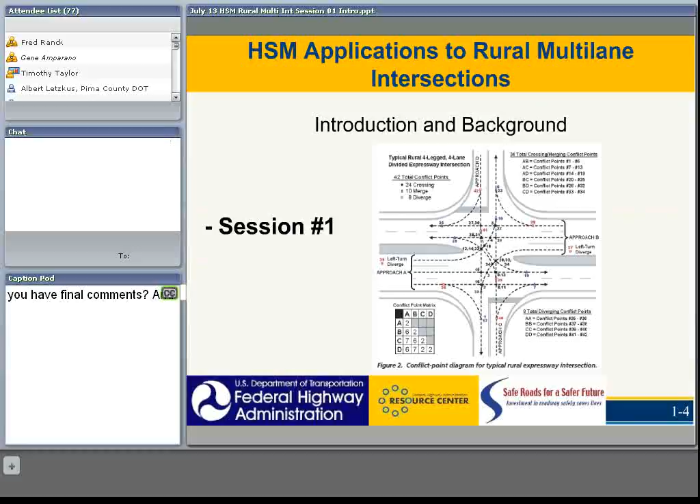This is session 1, which is basically introduction and background to the rural multi-lane intersections applications of the Highway Safety Manual. In this first session, what we hope to do is review the crash frequency performance of rural multi-lane intersections, that is the safety, and also define the substantive safety that can occur beyond the nominal safety effects.

When you look at the total of multi-lane highways, both rural and urban, we have approximately 4 million miles of public roads, nearly 1 million miles on the federal aid system, and about 166,000 of those are multi-lane highways, or about 17%. About 45,000 miles are multi-lane undivided, making up about 27%. And a bulk of 121,000 miles are multi-lane divided, or about 73%. So there are more divided multi-lane highways than undivided, and that's what we're going to be looking at today, are the multi-lane divided.

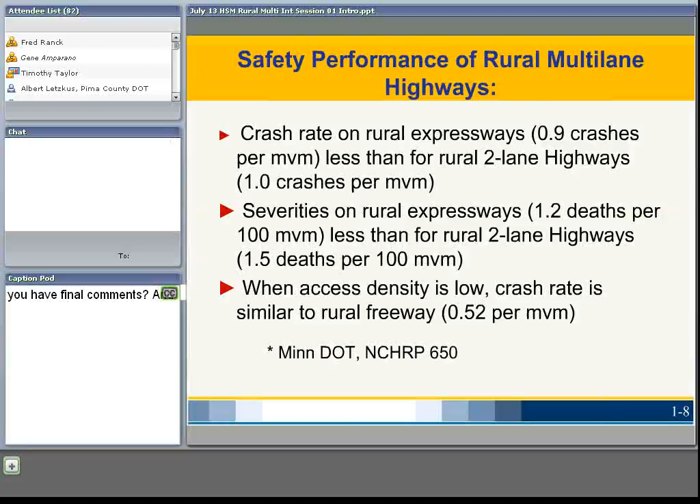In 2008, of the U.S. total intersection crash characteristics, there's a significant amount of accidents occurring at intersections, based on the highlight there. We find that this number is overrepresented because 57% of fatalities and serious injury crashes are occurring at intersections, which is an overrepresentation based on the number of miles or segments versus intersections.

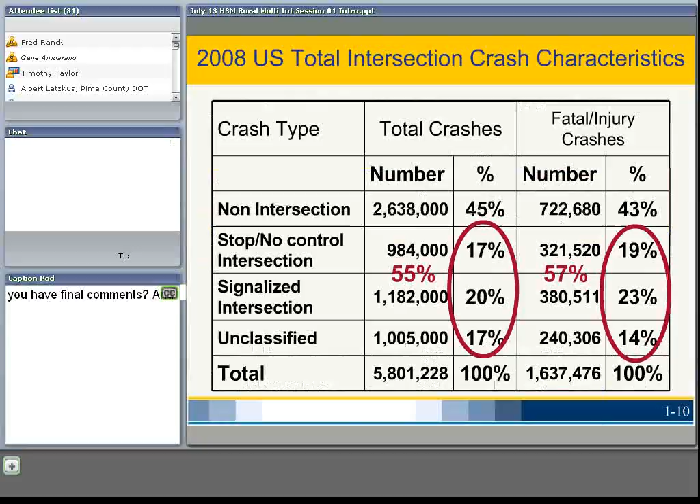When we look at crashes by divided and undivided highways, we see that the crashes for unsignalized divided expressways greatly outnumber the crashes for signalized divided highway intersections, approximately 56.5% at unsignalized locations—two-way stop control intersections, which is very typical of intersections you find on rural divided highways.

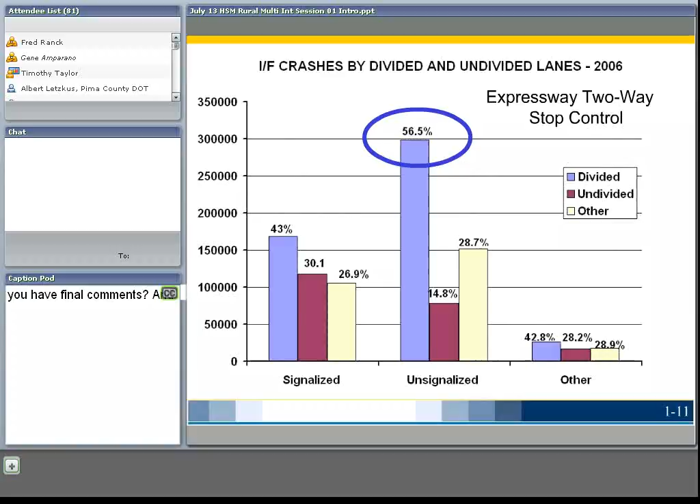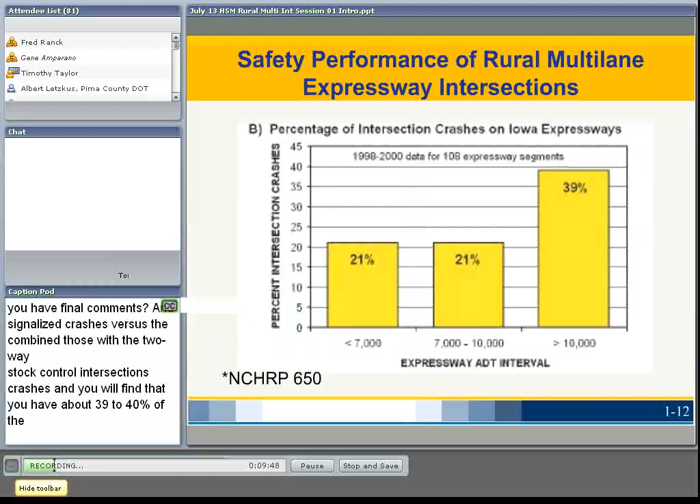This graph shows the percentage of intersection crashes in Iowa for their expressways, 39% intersection crashes when the ADT is over 10,000, which relates closely to what we saw from the earlier slide. When you combine the signalized crashes with the two-way stop control intersection crashes, you find that about 39 to 40% of the crashes are occurring at intersections.

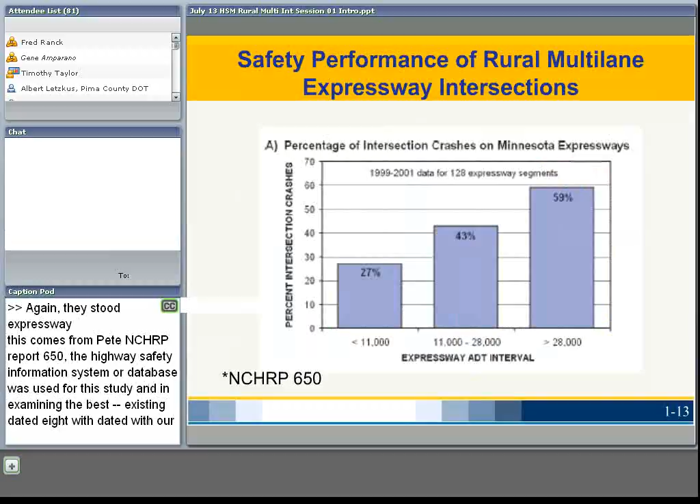Again, a MnDOT study, expressways. This too comes from the NCHRP report 650. The Highway Safety Information System, or database, was used for this study. In examining the existing data for the 5 states in the system, which Iowa and Minnesota were included, it's now been expanded to 8 states. It was determined that supplemental information on roadway access points and roadside condition would be needed.

One efficient way to collect this type of data is through the video disc photo logs. The photo log simply contains images of the roadway taken at 16-meter intervals, and these images can be randomly accessed in seconds under the control of the microcomputer. At the time this study was conducted, the video disc photo logs were only available for Minnesota, so only data from Minnesota were used for the statistical modeling analysis.

Data for accidents reported from 1985 through 1990 were used for this study. Things came out of this study that were significant, one of which was that 87% of right-angle crashes were due to the inability of minor road drivers to recognize the oncoming expressway traffic, and/or their inability to select a safe gap in the expressway traffic stream.

The other thing noted was that 78% of the right-angle crashes were far-side type collisions. That is, a right-angle crash involving left-turning or crossing minor road vehicles that successfully cross the near-side intersection across the median, but then collided with an oncoming vehicle on the far side of the intersection.

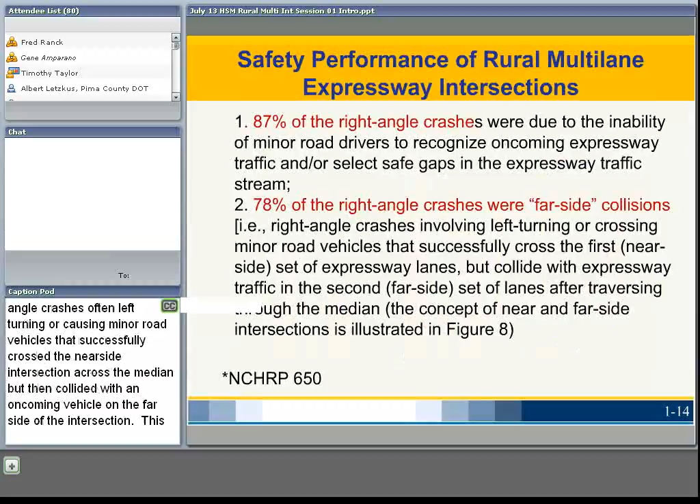This will be illustrated in the next slide. But the third thing found from this study is that intersection recognition was not important. We may think that running of the stop sign was a major contributing factor, so the recognition by drivers on the minor or stop-controlled approach was not, in fact, a contributing factor in any of these right-angle type crashes at these intersections.

Another study found that the ratio of far-side versus near-side collisions at 30 two-way stop control rural expressway intersections with the highest crash severity indices in Iowa was 62% to 38%.

However, at 7 of the intersections where horizontal curves were present along the expressway, the far-side and near-side collisions were nearly equally distributed at 51 and 49% respectively. So therefore, it looks like horizontal curves on the main line seem to create a unique hazard for the minor road approach.

This illustrates the near side versus far side. So if north is up and south is down, a vehicle on the north or southbound approach colliding on the first roadway would be a near side intersection, and colliding with a vehicle again southbound on the far side intersection on the other roadway would be considered a far side intersection.

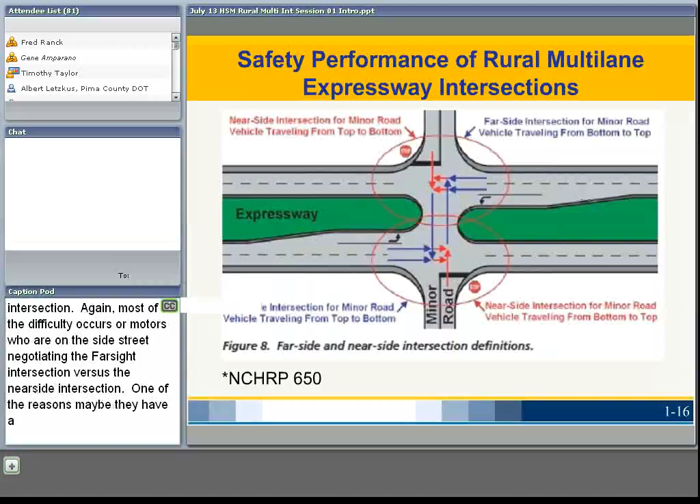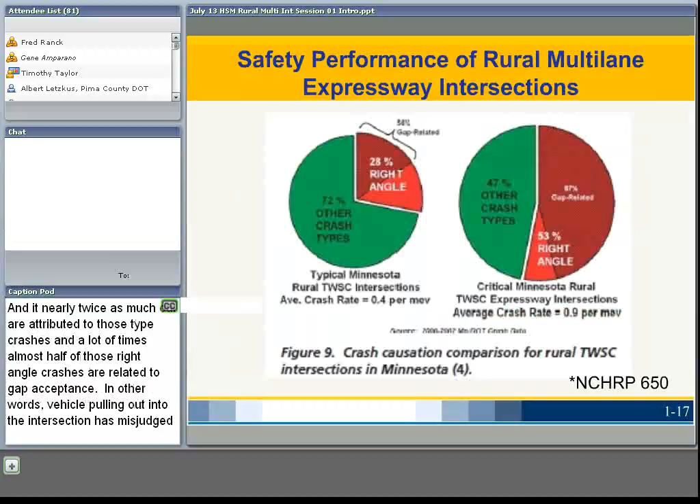Key safety principles and design: we all know that knowledge is imprecise, but judgment is essential. Meeting the standards does not necessarily make a highway safe.

Some of the important features of highways are not determined by the standards, such as alignment of left turn lanes, whether they're angled or parallel, spiral transitions to curves, or the use of center two-way left turn lanes. So we know that meeting the prevailing highway design standard does not necessarily make a highway safe. The word standard gives rise to sometimes misinterpretation. We often think of a standard as being a guarantee of some degree of quality. Conversely, if something is substandard, it's understood to be deficient. So implied is a distinct difference between what is good and acceptable and what is bad and deficient. And this meaning does not apply to highway design standards in their relationship to highway safety.

This is a bit of a new way of thinking, but one that is necessary with the advent of the Highway Safety Manual. The safety of a highway does not change abruptly when some highway dimension changes slightly. In addition, highway design standards evolve with time, and are not a demarcation between what is safe and unsafe. Many highway design standards are limit standards, and just meeting them does not necessarily make the highway as safe as it can be. So it is a sign of an ungenerous design that may or may not be justified.

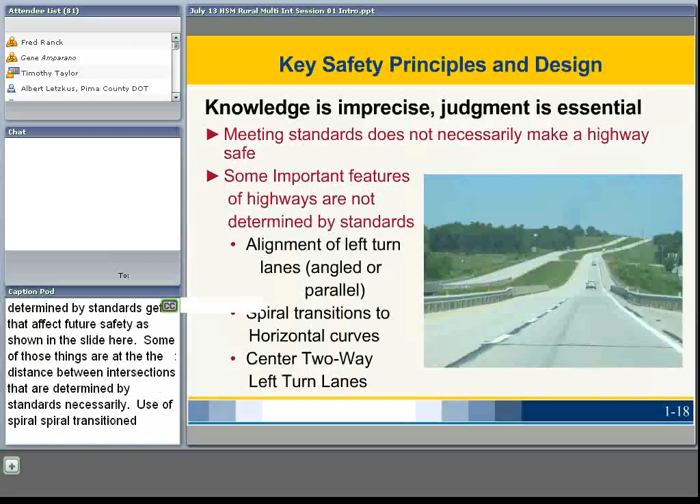Important features of the highway are not determined by standards, yet they affect its future safety, as shown here. Some of those things are the distance between intersections, which isn't necessarily determined by standards, use of spiral transitions to horizontal curves, and other things.

That leads us again to the discussion of nominal safety versus substantive safety. If you've been involved in webinars in the past, you're probably familiar with this, but to repeat for those who are not: nominal safety refers to compliance with standards, warrants, guidelines, and sanctioned design procedures. Substantive safety is the expected or actual crash frequency and severity for a highway or roadway. The term nominal safety was coined by Dr. Ezra Hauer. It was used to describe the characterization of a situation in terms of its adherence to design standards and practices.

We can think of a road as being nominally safe if it meets the minimum standard of care and is current with respect to published standards and guidelines. On the other hand, substantive safety, or a quantitative approach to safety, is its actual or expected performance in terms of crash frequency and severity. So it begs the question: are the two dimensions of safety the same, or do they express related yet fundamentally different information about a highway?

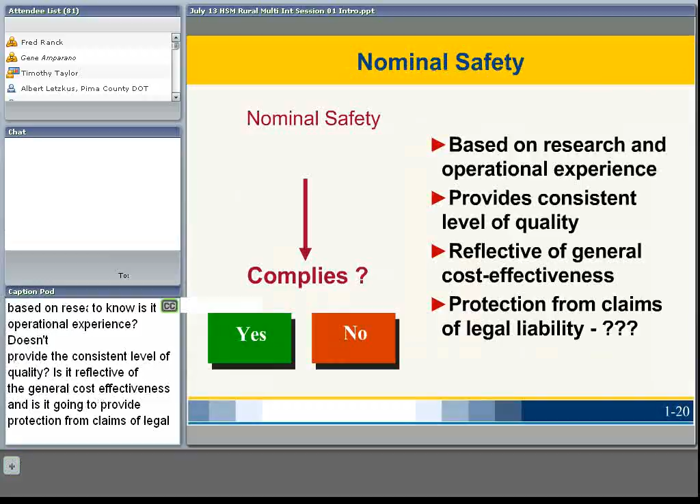When we consider nominal safety, we want to know: is it based on research and operational experience? Does it provide a consistent level of quality? Is it reflective of general cost effectiveness? And will it provide protection from claims of legal liability? That's basically the first step—have we complied with nominal safety? And that's simply a yes or no question.

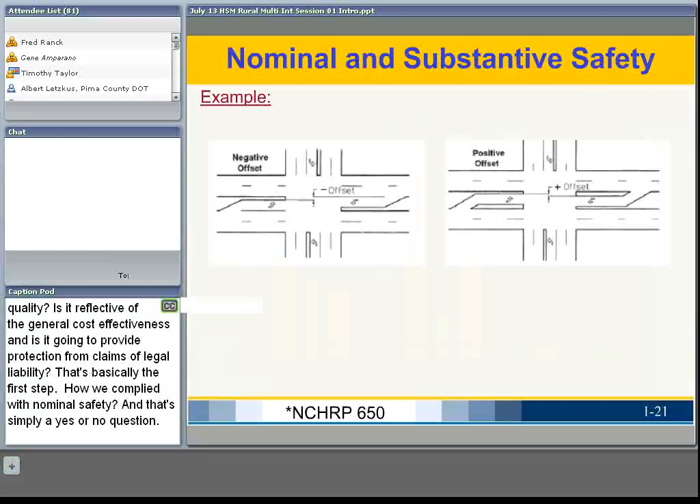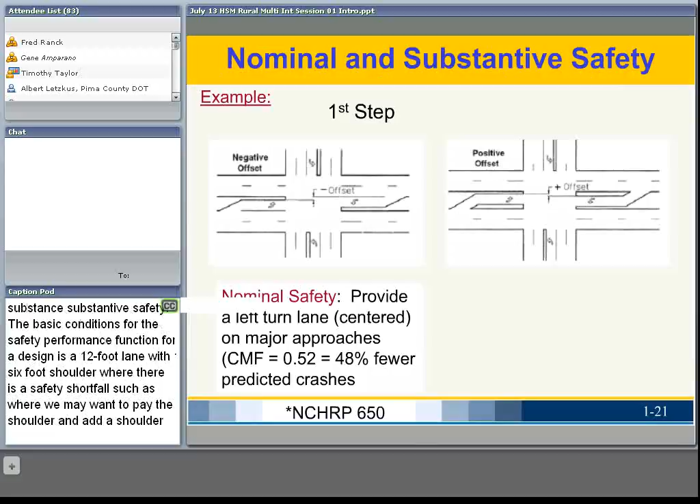An example of this concept: AASHTO says a nominal shoulder is 6 feet, and an 8-foot shoulder has a crash modification factor of 0.87. From NCHRP 486, to illustrate the difference between nominal and substantive safety, the base conditions for the safety performance function for an AASHTO design is a 12-foot lane with a 6-foot shoulder, where there is a safety shortfall, such as where we may want to pave the shoulder and add a shoulder rumble strip instead. This could reduce the run-off-road crashes.

An example of nominal safety would be providing a left turn lane on major approaches where we could expect crash reductions. A substantive safety measure would be to use a positive offset for the alignment of the left turning lanes, where we could expect 23 to 50% fewer total crashes.

So the purpose of this portion of the module is to clearly describe the workshop to the participants. The safety effects can be measured and quantified just as the effects of capacity have been measured and quantified for years using the Highway Capacity Manual. As practitioners, we need to fully understand and quantify intersection operations and safety performance in the pursuit of informed and balanced decision-making.

Methods to quantify capacity operations have been in use since the late 1950s, up until the most recent edition of the Highway Capacity Manual, and these methods for operational assessments are well documented and in widespread use. So methods to quantify safety are now taking form based upon the research compiled in the new Highway Safety Manual.

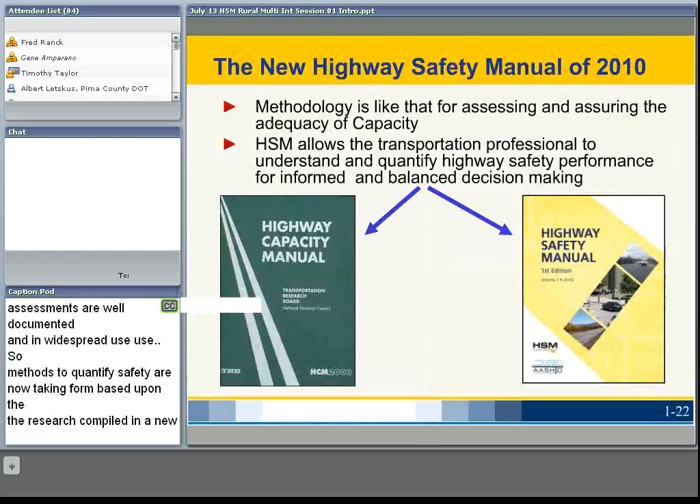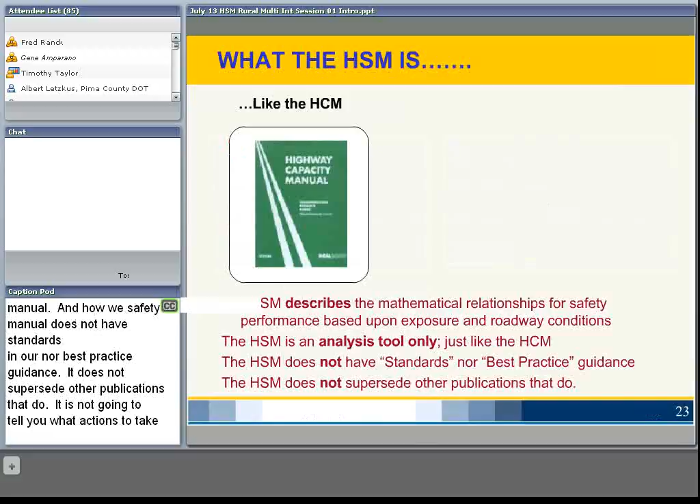What is the Highway Safety Manual? It's like the Highway Capacity Manual. The Highway Safety Manual describes the mathematical relationships for safety performance based upon exposure and roadway conditions. It's an analysis tool only, just like the Highway Capacity Manual. It does not have standards nor best practices guidance, and does not supersede other publications that do. It's not going to tell you what actions to take and what actions not to take.

Versus other documents such as the MUTCD or the AASHTO Green Book, these do represent standards which have to be adhered to.

So the Highway Safety Manual is a set of tools for prediction of crash frequency and for analysis of safety, and it facilitates explicit consideration of safety throughout the project development process. It provides a synthesis of validated highway safety research over a number of years, and analytical tools for predicting the impacts of decisions that we make every day on road safety.

The new Highway Safety Manual of 2010 contains the best science and research over a number of years, going past a decade or more. It's a synthesis of previous research, and it also includes new research that was commissioned by both AASHTO and FHWA for use in the Highway Safety Manual.

What can the Highway Safety Manual do for you? Currently, we're quantifying environmental impacts, we're quantifying operational analysis through use of the Highway Capacity Manual and other tools, and we're performing economic analyses. The Highway Safety Manual will allow us to add safety impacts to also quantify these in consideration of project development, programming, operations, and maintenance.

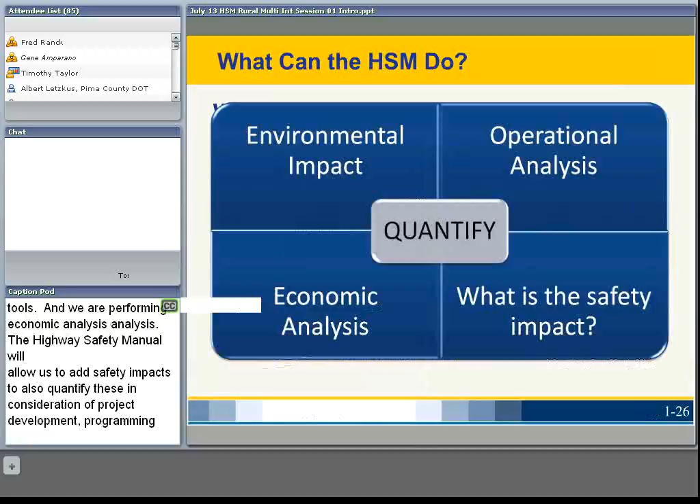How can a crash prediction be used? Well, any number of ways. At the program level, to prioritize segments or locations for selection of projects and upgrades. At the project level, to assess the relative needs for a project and to communicate the relative needs to the public in numbers now.

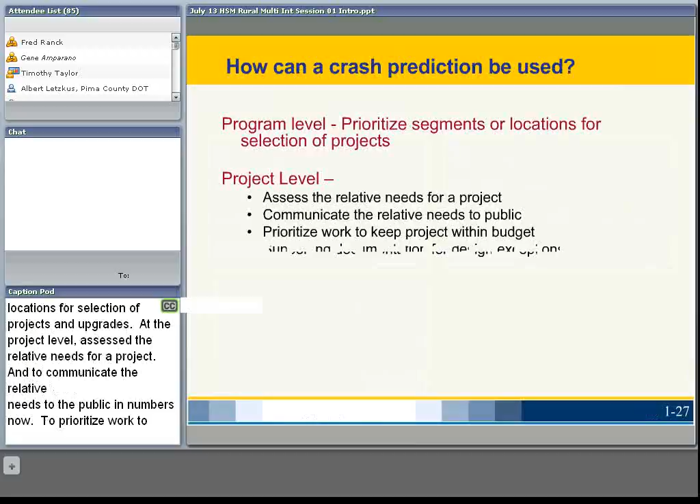It can prioritize work to keep projects within budget, and provide supporting documentation for design exceptions. It can also be used for tort defense if used properly. This tool can help quantify the relative safety of a facility and demonstrate that an agency is addressing those safety needs appropriately.

Considerations of safety in the design process: it is the policy of FHWA that safety must be fully considered in every aspect of all of these phases. In July of 2004, a memorandum by Administrator Peters cited safety as the main priority of the DOT, stating: 'I fully support Secretary Mineta's view that safety is the main priority of the DOT. We need bold actions and initiatives that will lead to a significantly safer road network.'

To achieve the DOT national fatality rate goal of 1 by 2008, safety must be fully considered in every aspect of our business, from planning and programming, environmental analysis, project design, construction, to maintenance and operations. We have to use data-driven decision-making and ensure that safety is a key input in any decision made in the project development process. FHWA must also assert its influence even beyond its traditional federal aid program responsibility, as a major portion of the nation's safety challenge is off the federal-aid highway system.

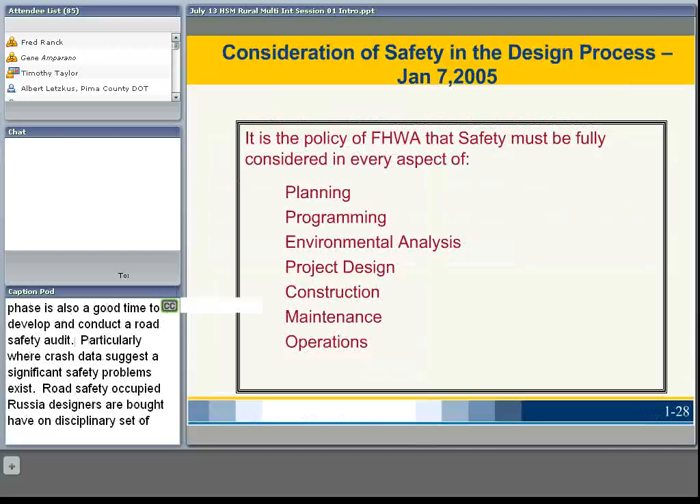The preliminary design phase is also a good time to develop and conduct a road safety audit, particularly where crash data suggests a significant safety problem exists. A road safety audit provides project designers a broad, multidisciplinary set of perspectives that will add important insights and define the strategies that will address whatever critical safety challenges of the project exist.

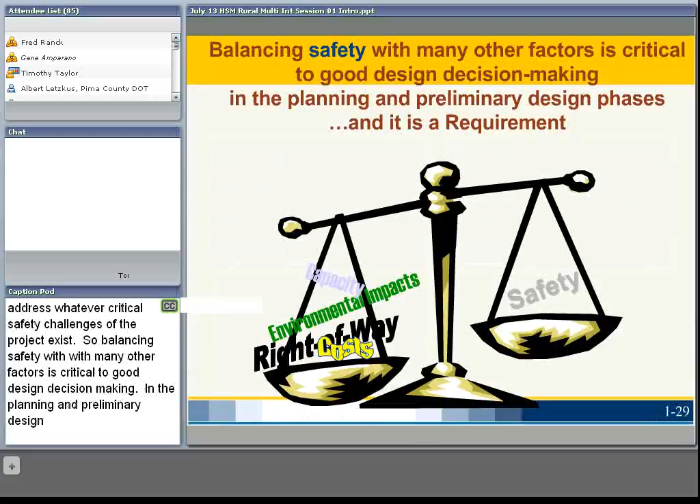So, balancing safety with many other factors is critical to good design decision-making in the planning and preliminary design phases, and it is a requirement.

So what is the role of road design in crash prevention? Design can reduce the incidence of human error, the chance of human error resulting in a crash, and the severity of the consequences of crashes if and when they occur. So how a particular section of highway or street or intersection is built, the engineering, and how it is operated...

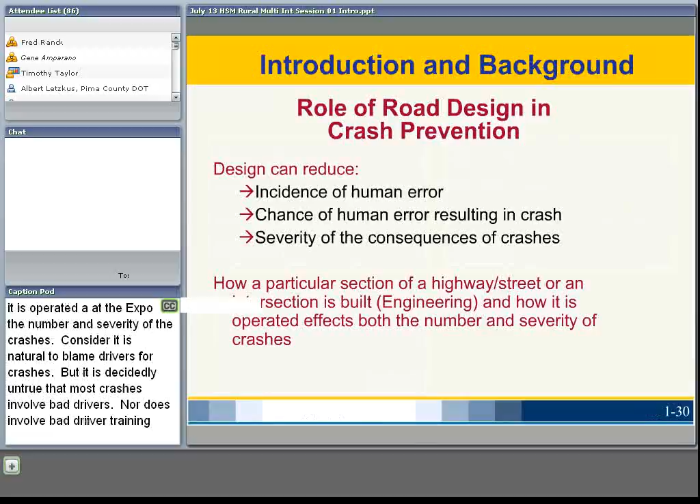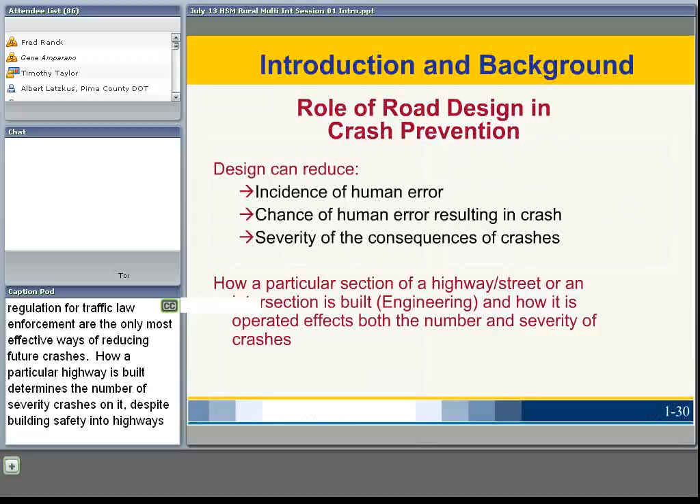affects both the number and severity of the crashes. Consider, it is natural to blame drivers for crashes, but it is decidedly untrue that most crashes involve bad drivers. Nor does it follow that driver training and testing or education, regulation, or traffic law enforcement are the only or most effective ways of reducing future crashes. How a particular highway is built determines the number and severity of the crashes on it. This is why building safety into highways is so critically important now.

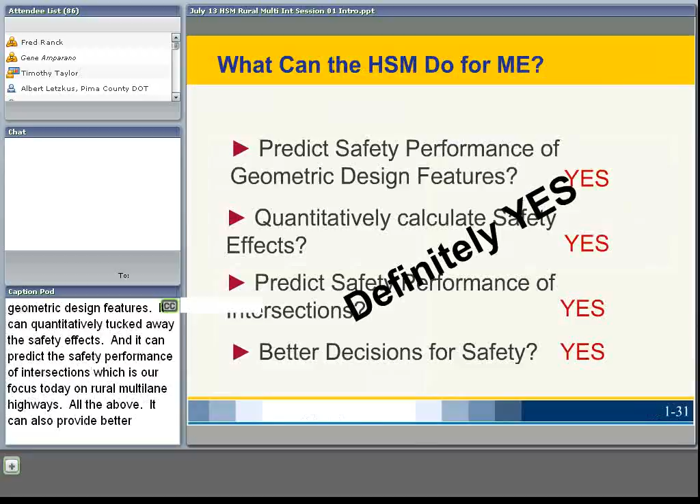So what can the Highway Safety Manual do for you? It can predict the safety performance of geometric design features, quantitatively calculate the safety effects, and it can predict the safety performance of intersections, which is our focus today on rural multi-lane highways. All the above. It can also provide better decisions for safety, obviously.

So the learning outcomes: to review the crash frequency performance of rural multi-lane intersections, just a brief overview of that, and also compare substantive safety versus nominal safety and how we go above simply providing nominal safety.

Okay, at this time, I'm going to turn it back over and we'll go to session 2.

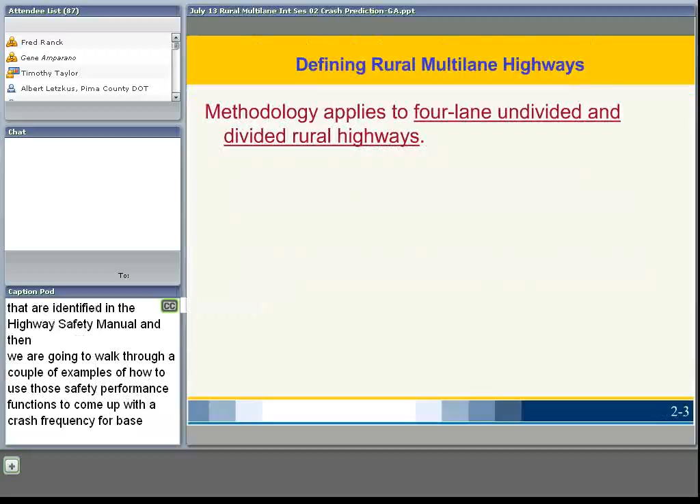Okay, now that we resolved that problem, we're going to move on. This is session 2, and the main focus of this session is to talk about the prediction of crash frequency for rural multi-lane intersections. So we're going to describe the models to predict crash frequency, and when we say models, we're talking about safety performance functions that are identified in the Highway Safety Manual. And then we're going to walk through a couple examples of how to use those safety performance functions to come up with a crash frequency for base conditions for a rural multi-lane intersection.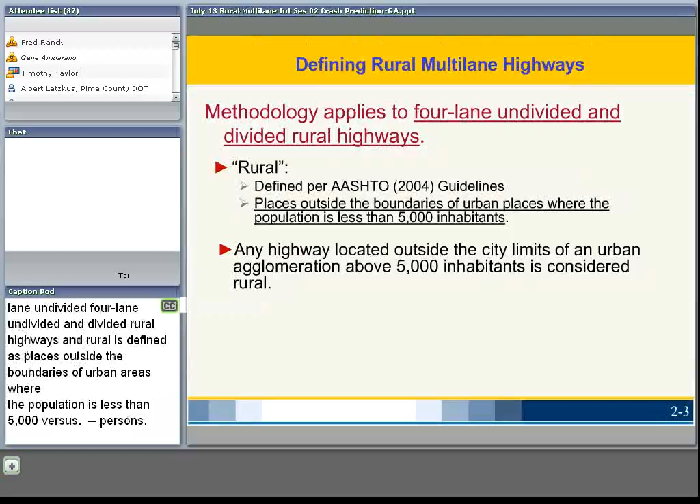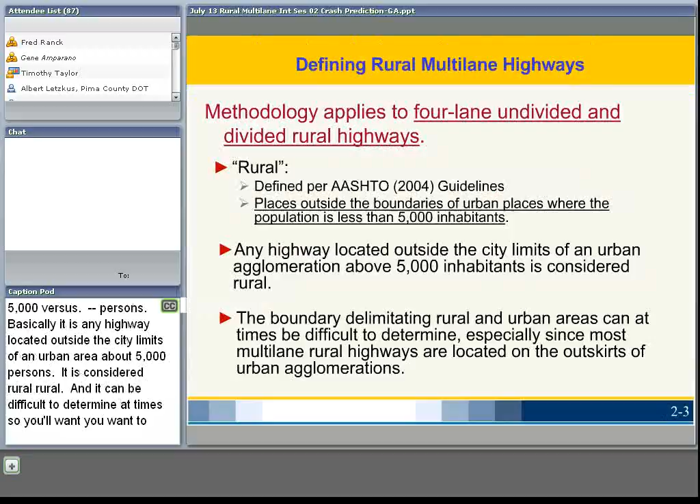Before we get started on that, we need to define what a rural multi-lane highway is. It applies to 4-lane undivided and divided rural highways. And rural is defined as places outside the boundaries of urban areas where the population is less than 5,000 persons. Okay, so basically it's any highway located outside the city limits of an urban area above 5,000 persons is considered rural. And it can be difficult to determine at times, so you'll want to approach this with a little bit of caution, but you should be okay.

Multi-lane facilities are defined as facilities that have 4 through lanes. They can be divided with a rigid or flexible barrier or with a paved or a landscaped median. They should not have access or egress limited by grade-separated interchanges. In other words, they should not be freeway-type facilities. But it's okay to have an occasional grade-separated interchange, but they shouldn't be the primary form of access or egress.

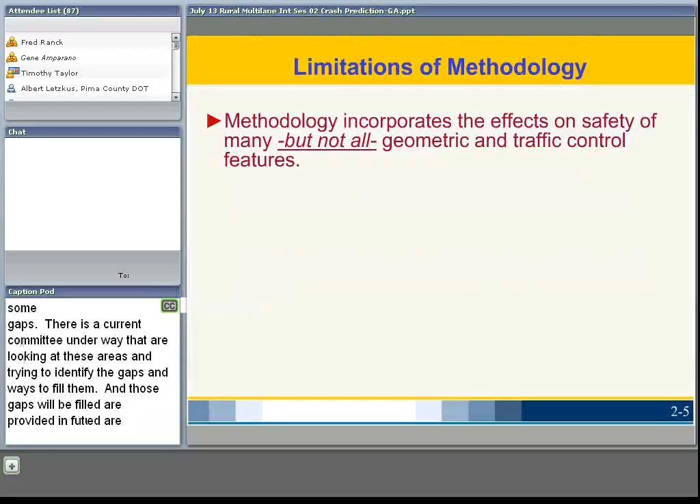There are some limitations on the methodology. This is the first edition of the Highway Safety Manual, and there are some gaps. There's a current TRB committee underway that is already looking at these areas and trying to identify the gaps and ways to fill them. Those gaps will be filled or provided in future editions of the Highway Safety Manual. Currently, the safety performance functions and crash modification factors being presented today are based on relationships that are well understood, where there's significant research that's been conducted that helped develop these particular mathematical models that we use for crash prediction.

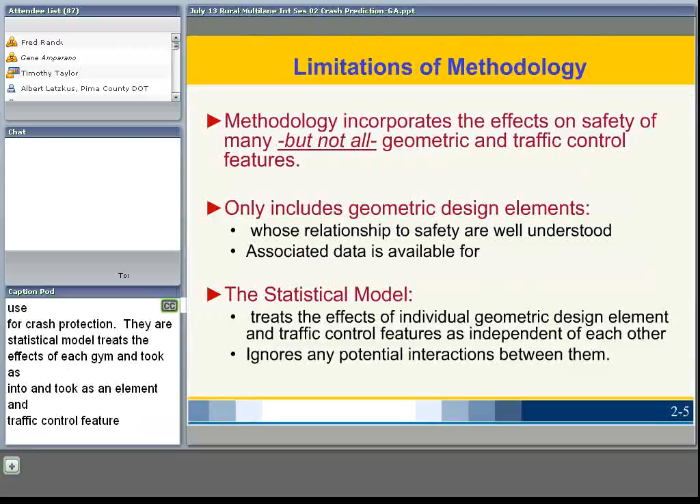They are a statistical model that treats the effects of each geometric design element and traffic control feature independently, and ignores any potential interaction between them.

There are safety performance functions, and there are separate functions for highway segments with homogeneous characteristics, meaning same type of lane width, shoulder type, cross slopes. And then we have separate safety performance functions for intersections. On July 7th, the safety performance functions and crash modification factors for highway segments of rural multi-lane highways were presented. And today we're going to present those same safety performance functions and crash modification factors that are identified for intersections out of the Highway Safety Manual.

A segment can begin or end anywhere along a roadway, but if the segment was being analyzed between two intersections, then the analysis point of this segment should begin and end at the center of those intersections.

The slides also discuss the importance of assigning crashes appropriately to either segments or intersection crashes. The Highway Safety Manual recommends that if you're within the physical limits of the intersection, which could be the curve radii or the crosswalk limits, then that's identified as Area A. Crashes occurring in Area A would be identified as intersection crashes.

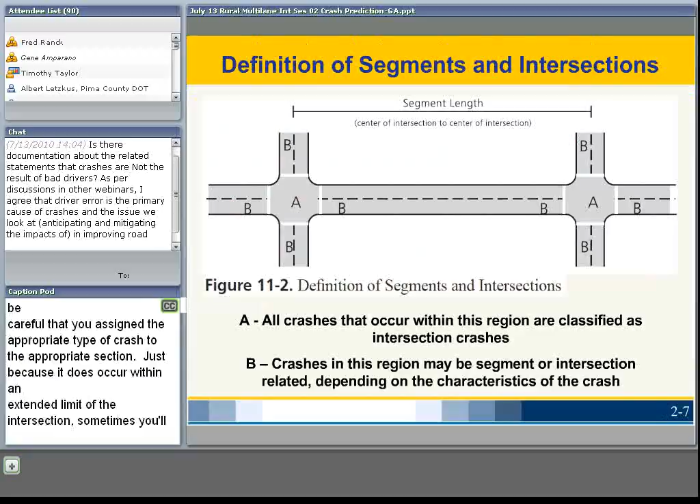And just because it occurs within the extended limits of the intersection, sometimes you'll have to take a look at the crash report itself to identify it as either an intersection or a segment-related crash.

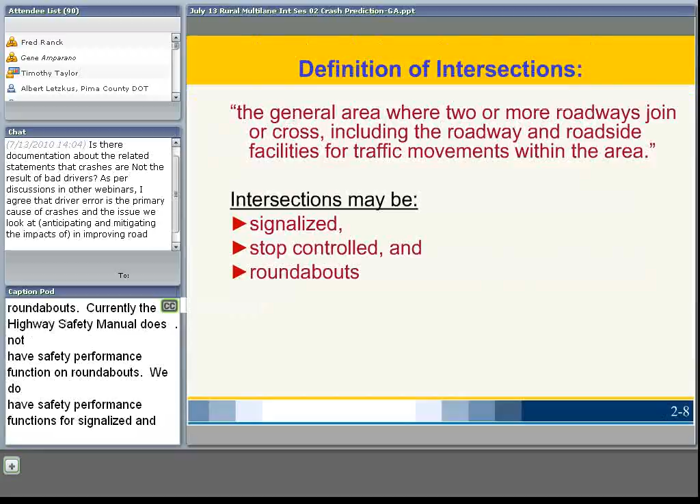Intersections are defined as the general area where two or more roadways join or cross. There are different types of intersections. They can be signalized, stop-controlled, or roundabouts. Currently the Highway Safety Manual does not have any safety performance function for roundabouts, but we do have safety performance functions for signalized and stop-controlled intersections.

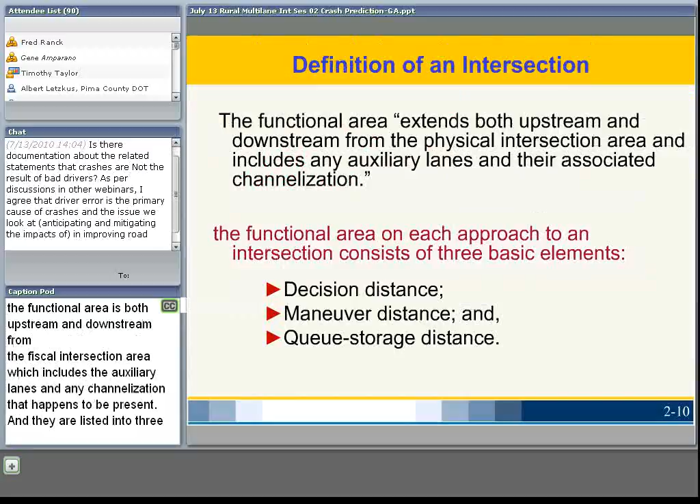The Highway Safety Manual further defines intersections as physical areas - being within the physical limits of the intersection itself, which could be the limits within the curve radii or the crosswalk limits - but they're also identified as a functional area. In the Highway Safety Manual, the functional area extends both upstream and downstream from the physical intersection area, which includes the auxiliary lanes and any channelization that happens to be present. They're listed into three basic elements: the decision distance, the maneuver distance, and the storage distance.

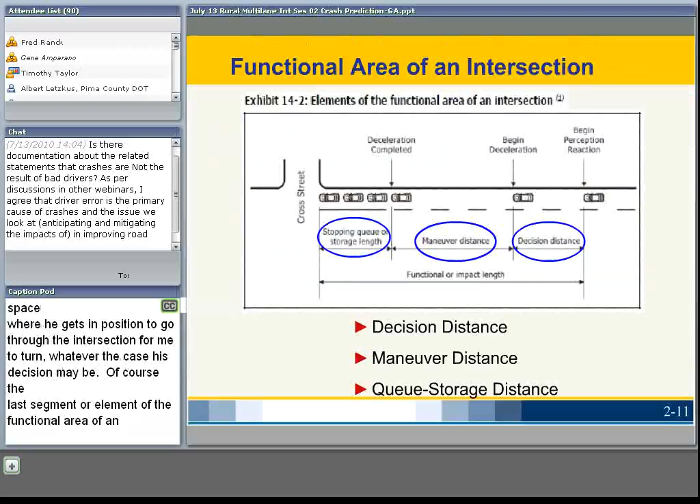Here's a diagrammatic view of what a functional area would look like. The decision sight distance: as the driver approaches the intersection, he makes a decision of what he's going to do, whether to make a turning maneuver or proceed through the intersection. Then the maneuver distance is that space where he gets in position to go through the intersection or make a turn movement, whatever his decision may be. And then the last element of the functional area of an intersection is the queue length, or the storage distance required for stopped vehicles.

The procedure for applying the crash prediction method at grade intersections has a couple of steps. We're assuming that you already have all the information needed to do the prediction or analysis, such as your traffic volumes, your signal type or intersection type, whether it's stop control or signalized, and anything geometrically associated with the intersection. There are two steps.

First is to apply the safety performance function model, which gives us a prediction for base conditions. This is the safety performance function for a multi-lane rural intersection.

Then the second step, which Fred Ranck will be covering, is that you take the safety performance function for a given set of base conditions, then apply crash modification factors that are associated with the geometric conditions of that intersection or traffic control elements, to adjust your predicted value to a more realistic actual value. So this is what we're going to be talking about today - in this session, applying the safety performance function model for base conditions.

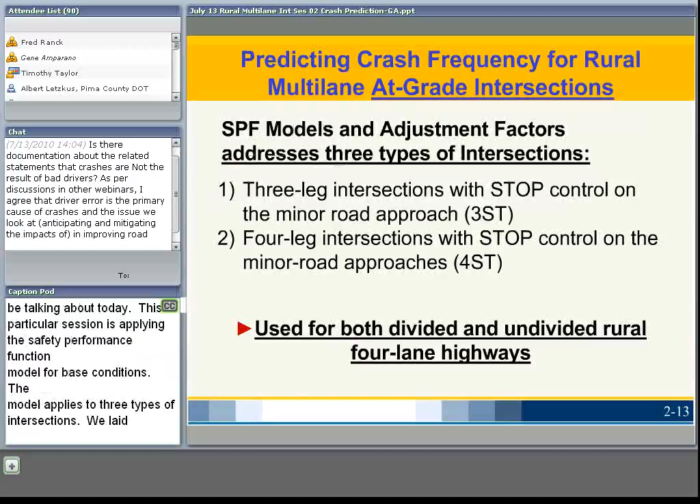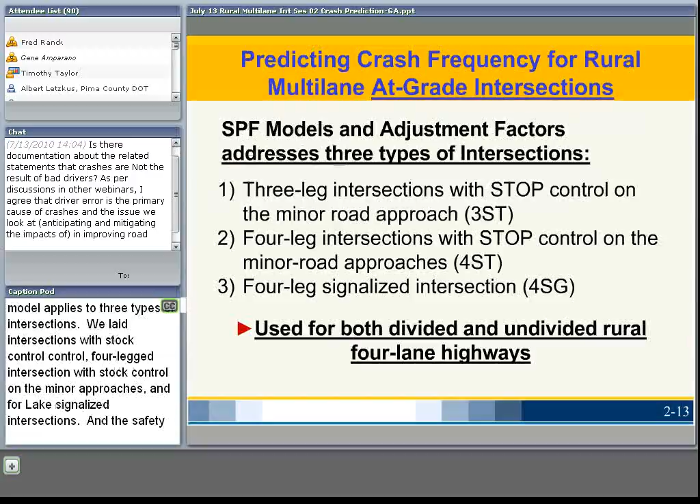The model applies to three types of intersections: three-legged intersections with stop control, four-legged intersections with stop control on the minor approaches, and four-leg signalized intersections. The safety performance function is good for both divided and undivided rural four-lane highways.

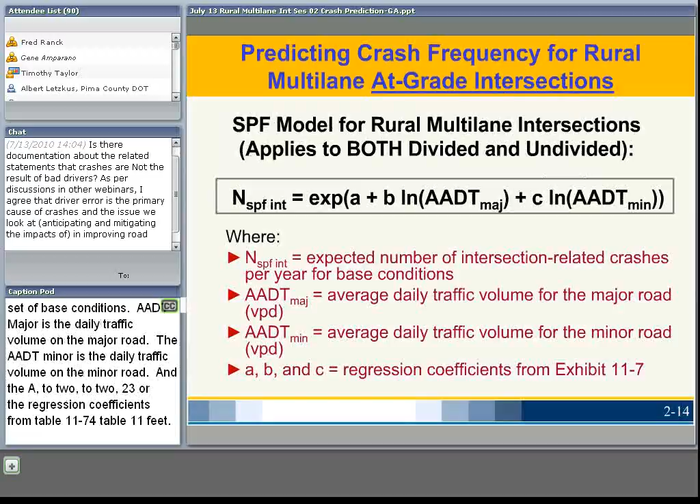Again, this is our safety performance function for rural multi-lane intersection, where subscript SPF-INT, safety performance function for the intersection, is the expected number of intersection-related crashes per year for a given set of base conditions. AADT major is the daily traffic volume on the major road. AADT minor is the daily traffic volume on the minor road. And A, B, and C are regression coefficients out of the Highway Safety Manual, from Table 11.7 or Table 11.8, depending on whether you're talking about stop control or signalized intersection.

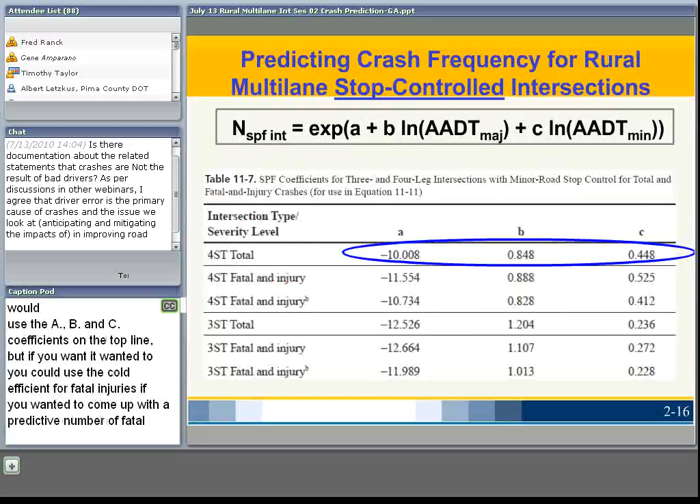In this example that we're going to be walking through shortly, we're going to be looking at total crashes, so we would use the A, B, and C coefficients in the top line. But if you wanted to, you could use the coefficients for fatal and injuries to come up with a predicted number of fatal and injury crashes only, for both four-way and three-way stop control intersections.

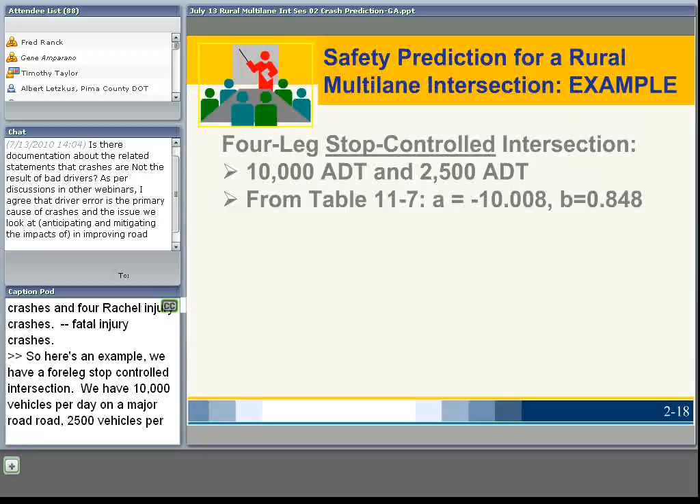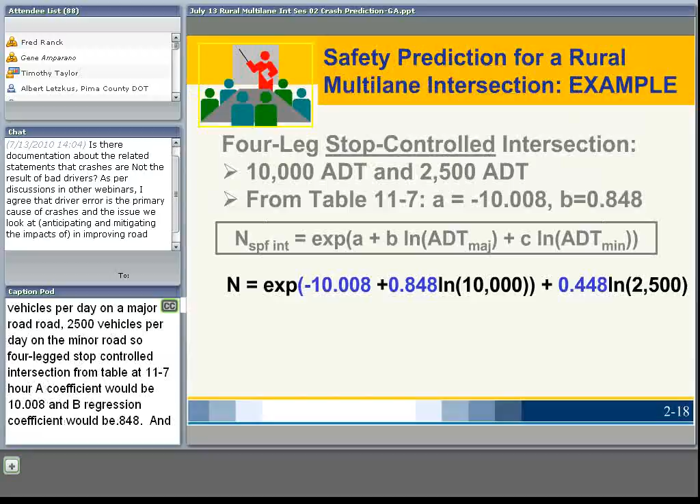Okay, so here's an example. We have a four-leg stop-controlled intersection, with 10,000 vehicles per day on the major road and 2,500 vehicles per day on the minor road. So for a four-legged stop-controlled intersection from Table 11.7, our A regression coefficient would be -10.008, our B regression coefficient would be 0.848, and the C coefficient, which was not listed, would be 0.448. Entering our traffic volumes and our A, B, and C regression coefficients into the safety performance function and performing that exponential calculation, we come up with a predicted number of crashes of 3.7 crashes per year for base conditions.

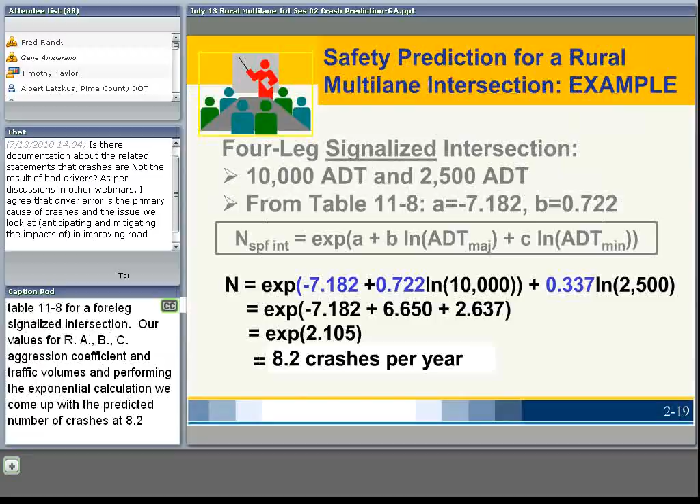Now, here's an example where we calculate the expected number of crashes for a signalized intersection using the same traffic volumes, but using the different coefficients from Table 11.8 for a four-leg signalized intersection. Entering our values for our A, B, and C regression coefficients and for our traffic volumes, and performing that exponential calculation, we come up with a predicted number of crashes of 8.2 crashes per year.

So the procedure for predicting safety: number one is the first step, to apply the safety performance function model for base conditions, which we walked through. The next step is to apply the crash modification factors and the calibration factor, if you so choose, to the SPF value to come up with a total predicted value of crashes for that particular intersection. Fred will be covering crash modification factors in the next session.

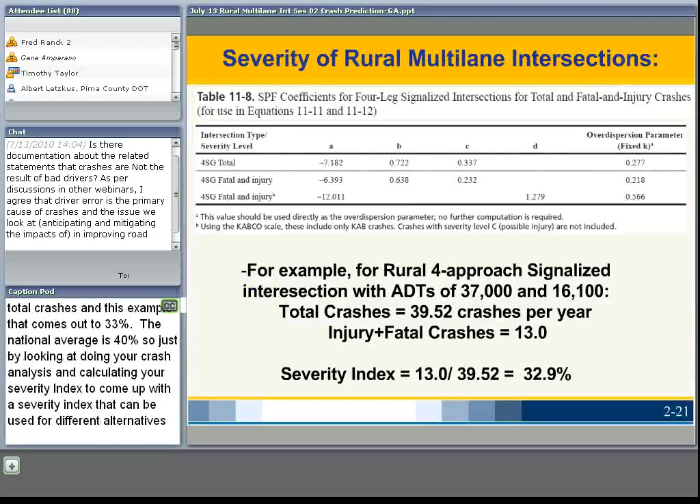So if you do your crash prediction, or if you know your existing crashes, you can come up with a severity index. For this example, we have a rural four-way approach, signalized intersection, with provided traffic ADTs, and the total crashes come out to be 39.5 crashes per year. But the fatal and injury crashes is 13 crashes per year. So you can calculate a severity index by dividing your injury and fatal crashes by your total crashes, and in this example it comes out to about 33%, while the national average is 40%. So just by doing your crash analysis and calculating your severity index, you can come up with a severity index that can be used for different alternatives or even for existing roadways to help prioritize those particular projects for further safety improvements.

So in this particular session, we demonstrated the application of the safety performance functions and how to predict or calculate the crash frequency for a rural multi-lane intersection. That concludes this session, and at that, I will turn it over to Fred Ranck.

The SPFs are rather thin, we only have a couple. In this session, I'm going to present what we know about the crash modification factors in Chapter 11 of the Highway Safety Manual. It's not extensive - this is the thinnest chapter in the entire Highway Safety Manual, the thinnest chapter in Part C. What we know about rural multi-lane is still more than what we have for interchanges and interchange access. That chapter is over in Part D - it did not make it into Part C because of the lack of rigor and well-supported research. So I wanted to give you how things fit into the big picture.

The CMFs for rural multi-lane intersections are just a few, and here's what we know. In this session, we're going to cover these CMFs and apply them in an example.

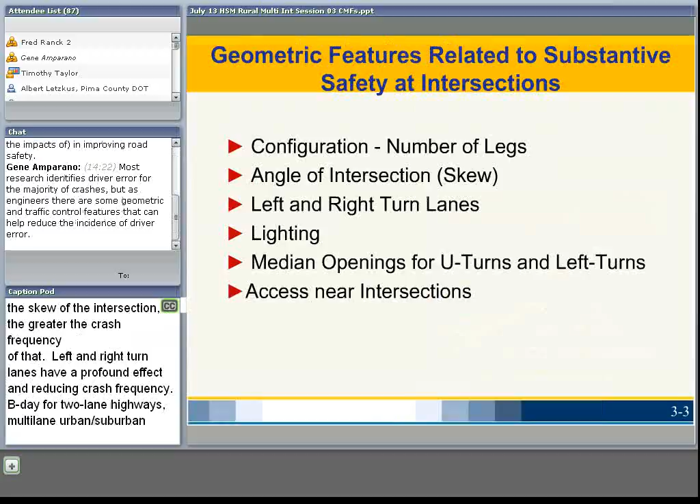Here are the items we know affect safety of rural multi-lane intersections. Configuration, the number of approaches, is really important - you saw it in the SPFs that Gene introduced in the previous session. For the same amount of exposure, ADT, for stop control, one stop on the stem of the T for a T intersection versus a two-way stop for a four approach stop controlled intersection: we have 9 conflicts for the T, 32 for the cross intersection. It is validated in the Highway Safety Manual that three-legged intersections are safer than four-legged intersections for the same exposure. Skew is a known effect - the more the skew of the intersection, the greater the crash frequency effect. Left and right turn lanes have a profound effect in reducing crash frequency, for two-lane highways and multi-lane urban and suburban highways, and they have that same significant effect for rural multi-lane intersections, and lighting.

Table 11-20 provides the CMFs for three-leg intersections, where minor leg stop control is one stop sign on the stem of the T. Table 11-21 is for four approach intersections with two stop signs controlling the minor approaches. You'll notice we have just four CMFs for rural multi-lane highways, for either three-leg or four-leg stop control only. There are no CMFs in Chapter 11 for rural multi-lane highway intersections that are signalized at this point in time. The data sets, known relationships, and available research were not robust enough to include that information in this first edition of the Highway Safety Manual.

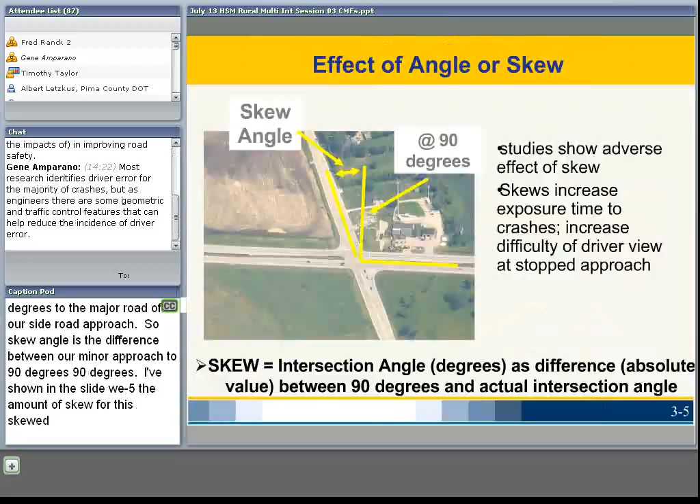So the effect of skew. Skew is the difference between 90 degrees to the major road and our side road approach - skew angle is the difference between our minor approach and 90 degrees. I've shown in slide 3-5 the amount of skew for this skewed intersection, rural multi-lane divided.

We have two equations, one for three-legged intersections, one for four-legged, both with stop control on the minor approach. Skew is actually in degrees in terms of the value to insert into the equation. This is the first crash modification factor for multi-lane intersections, rural.

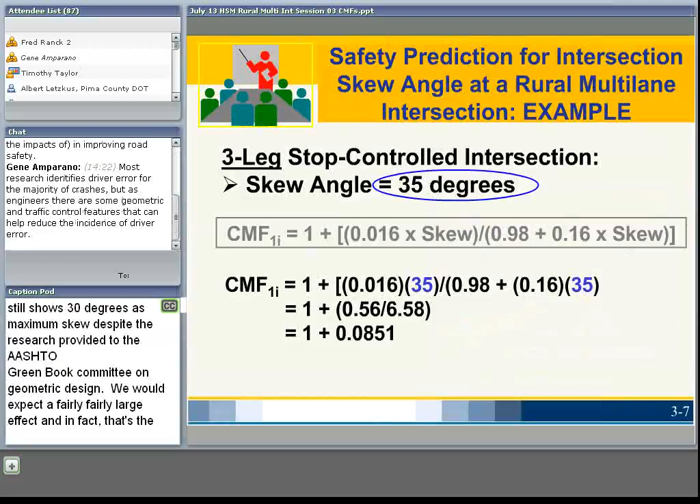For example, a three-leg, stop controlled intersection with a skew angle of 35 degrees - and 35 is a large amount of skew. Older driver research has indicated that skew should be limited to 15 degrees or less, particularly to meet the needs of older drivers and reduce their crash effect. We know that when we get above 15 degrees, crash frequency goes up - we have a larger effect. The AASHTO Green Book still shows 30 degrees as maximum skew, despite the research provided to the AASHTO Green Book Standing Committee on Geometric Design. So we would expect a fairly large effect, and in fact that's the case. Applying that to the formula, plugging in 35 degrees of skew, we see an effect of about 8.5%, or a CMF of 1.085.

This is a fairly big effect, though not as big as it would be for a two-lane roadway, meaning a two-lane undivided roadway, which we saw from Chapter 10. So the same amount of skew has less effect over in rural multi-lane.

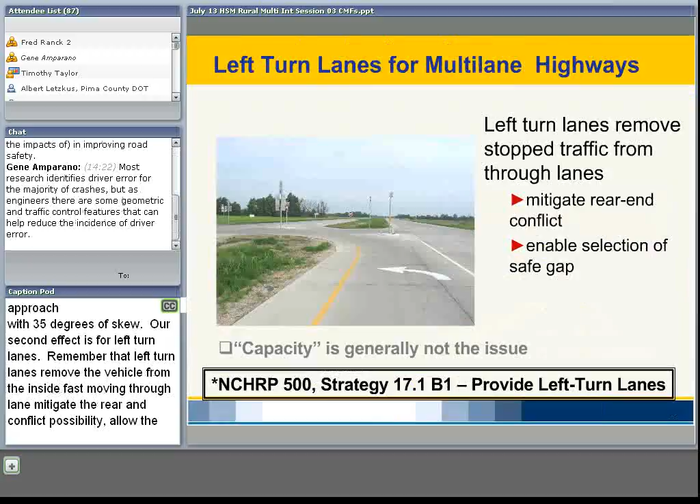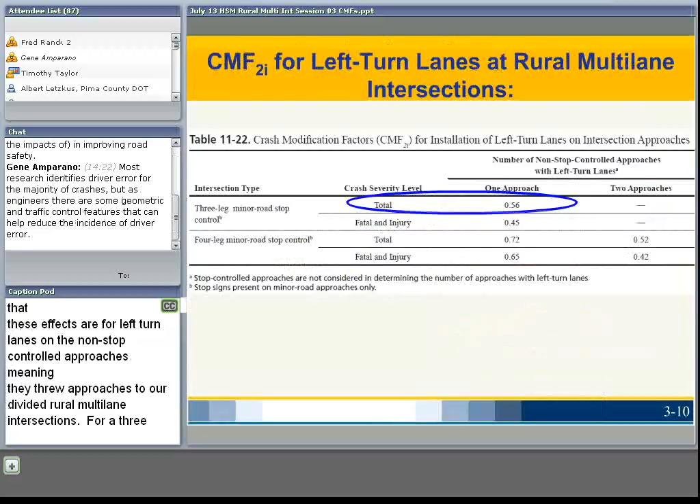Our second effect is for left turn lanes. Remember that left turn lanes remove the vehicle from the inside fast-moving through lane, mitigate the rear end conflict possibility, and allow the driver a safe place to select a gap in oncoming traffic to make a permissive left turn. Table 11-22 provides the CMFs for left turn lanes in terms of 1 approach and 2 approaches, and these effects are for left turn lanes on the non-stop controlled approaches, meaning the through approaches to our divided rural multi-lane intersection.

For a 3 approach intersection with 1 left turn lane, a CMF of 0.56 is a 44% reduction in crash frequency. The big 3 in highway safety for rural intersections are left turn lanes, warning signs, and lighting. Two of those three appear in the CMFs for rural multi-lane intersections in Chapter 11 of the Highway Safety Manual.

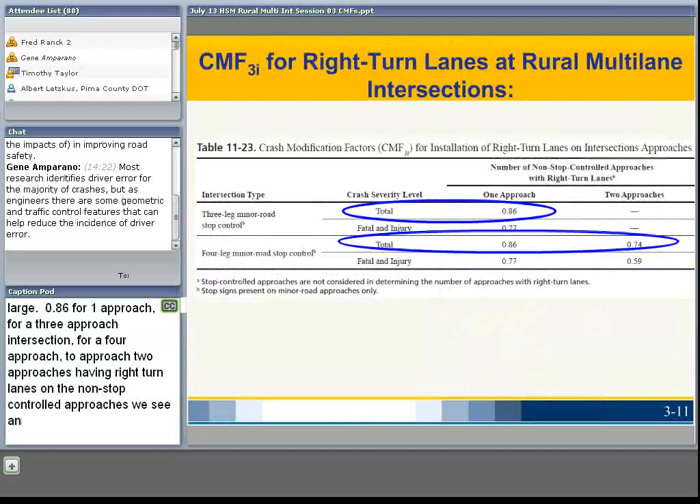For a 4 approach intersection with 2 left turn lanes, we see an effect of 0.52, or a 48% reduction in crash frequency associated with left turn lanes on the through non-stop controlled approaches. Again, left turn lanes are a major significant safety countermeasure for rural multi-lane intersections.

Right turn lanes also have an effect, though it's not as large: 0.86 for 1 approach in a 3 approach intersection. For a 4 approach intersection, 2 approaches having right turn lanes on the non-stop controlled approaches, we see an overall CMF of 0.74, which would be a 26% crash reduction.

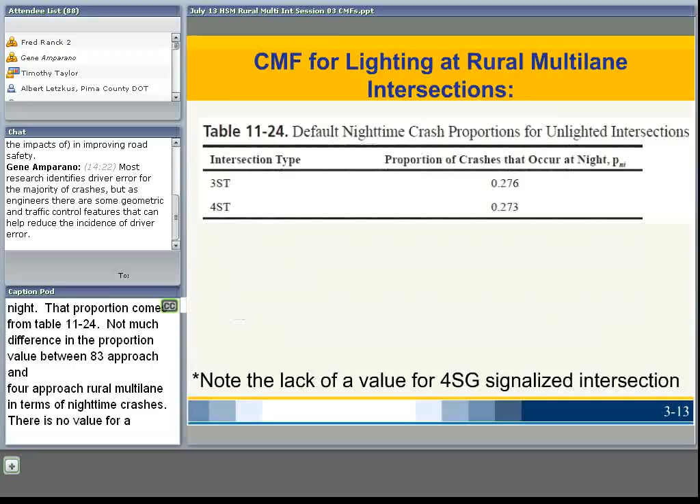Our 4th effect is lighting. For rural multi-lane intersections, the CMF is stated as 1 minus 0.38 times the proportion of total crashes for unlighted intersections that occur at night. That proportion comes from table 11-24.

Not much difference in the proportion value between a 3 approach and a 4 approach rural multi-lane intersection in terms of nighttime crashes. There is no value for a signalized intersection with 4 approaches in Chapter 11 of the Highway Safety Manual. So, for an example for lighting, our 4 approach intersection value would be 0.273. Plugging into our equation, we get a CMF of about 0.896, which is a little over a 10% reduction in crashes.

And remember, this is the key thing: lighting affects primarily crashes that occur at night, when there's less traffic and fewer hours of darkness than there are hours of daylight. So we have less exposure, and we don't expect lighting up the intersection at night, when there's less traffic, to have a huge effect.

This is an effect on total crashes. Almost all of the CMFs, the known safety effects in the Highway Safety Manual, are implicit, assumed to be for total crashes. Only in a few cases do we identify a CMF for a specific crash type or pattern, and that's the case here. Normally we would expect an effect of lighting to be about a 30% crash reduction—not untypical, well documented in the research and in safety studies.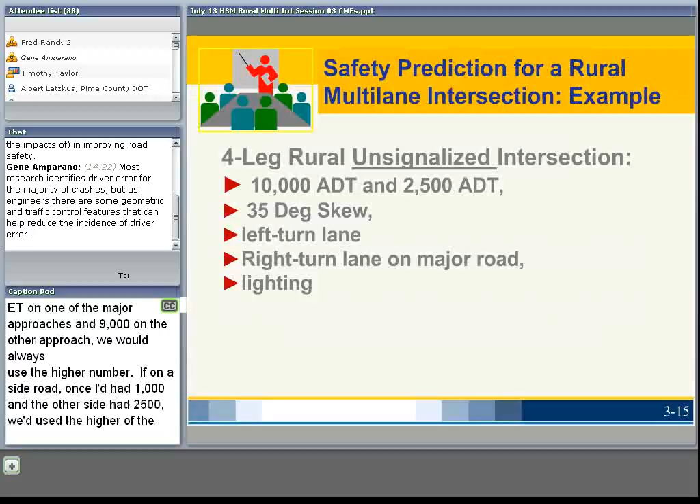For example, we have a four-leg rural unsignalized intersection. That means it's stop control—two stop signs of the four approaches, and those stop signs face the minor approaches. 10,000 ADT meets 2,500 ADT. This is not entering volume; this is the ADT of the major road or the minor road.

If we had 10,000 ADT on one of the major approaches and 9,000 on the other approach, we would always use the higher number. If on the side road one side had 1,000 and the other had 2,500, we would use the higher value, in this case 2,500.

35 degrees skew. We've got left turn lanes on the major approach, a right turn lane on the major road, and we have lighting. So our predicted value, in working through this as an example from our SPF that Gene showed you in session 02, is...

3.7 crashes per year. Now, in applying our CMFs for skew, left turns, right turns, and lighting: our skew value is 1.092 from our previous example, left turns 0.52, right turns 0.74—and that left turn CMF is for two left turn lanes on the two major road approaches, it would be less if we only had one. And our value for lighting is 0.896 from the previous example.

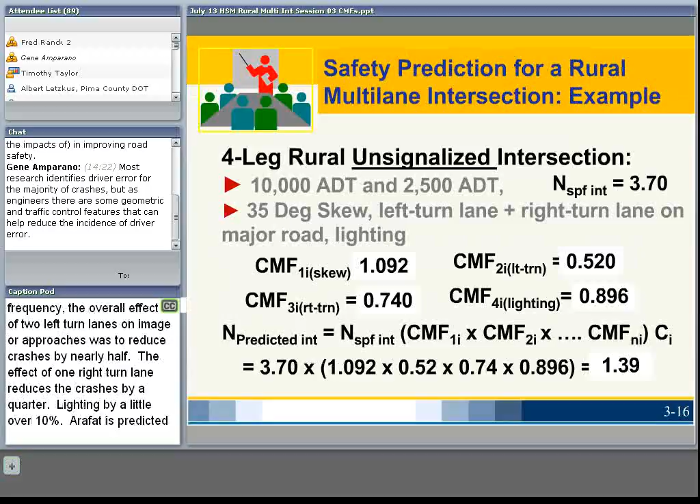Applying the CMFs in a multiplicative manner to our 3.70, we get an overall predicted crash frequency, for each of the effects combined, of 1.39. That's less than half the crashes we predicted for the base conditions of 3.70 using the SPF. So the overall effect of skew was to increase crash frequency, while the overall effect of two left turn lanes on the major approaches was to reduce crashes by nearly half.

The effect of one right turn lane reduces the crashes by a quarter. Lighting reduces them by a little more, just over 10%. So our net effect is a predicted crash frequency of 1.39 per year when we've applied these conditions for our specific intersection, which differ from the base conditions of the SPF.

There are no CMFs in this first edition for signalized rural multi-lane intersections. There is some information in Chapter 14 of Part D, but it wasn't robust enough to make it into Part C, Chapter 11. It sounds strange, but it's literally the limitation of how much we know, in terms of the data sets available to make a robust regression line to develop a CMF that was robust.

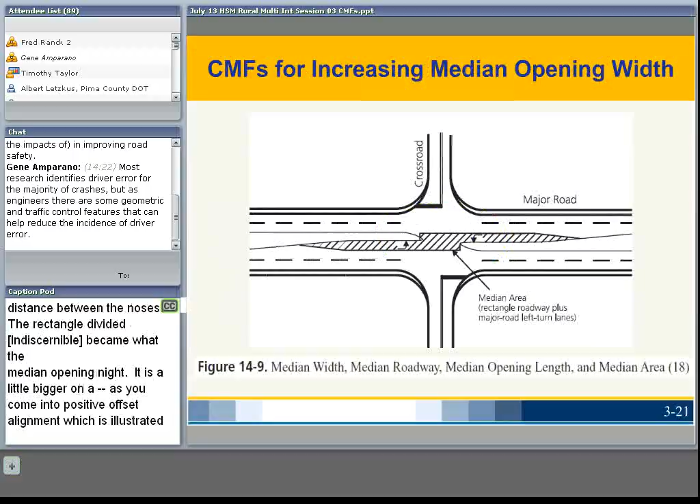From the analysis, some additional CMFs are over in Chapter 14 of Part D. You can use them individually, but be careful about combining them. Use them as an assessment of the safety treatment to assess the effect, for increasing the median opening width, converting minor road stop control to all-way stop control to signal control, left turn lanes on major approaches, right turn lanes on two approaches.

For median width, the median width opening is the distance between the noses, the rectangle defined by median width and median opening length. It's a little bigger on a positive, as you come into positive offset alignment, which is illustrated in this example, from Figure 14.9 in Chapter 14.

The effects are shown in Table 14.17. For rural, four-leg, unsignalized intersections, a CMF of 0.96, all severities, would be a 4% crash reduction. That is the available CMF for the effect of increasing the median width by an additional 3-foot increment, shown under treatment on the left-hand column. If you did more than 3 feet, you would expect that this would be multiplicative for each 3 feet.

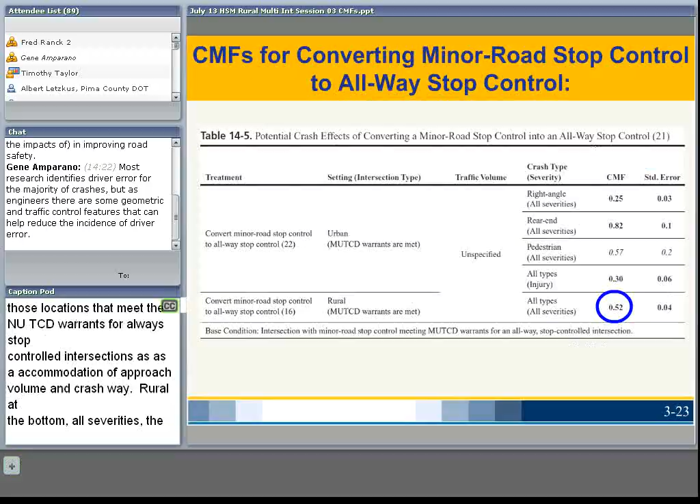So if you increase the median opening by 12 feet, you would get 4 times the effect, so it would be 0.96 times 0.96 times 0.96 times 0.96, or in other words, the CMF raised to the power, to get the overall effect for that 3-foot increment 4 times over.

Minor road stop control to all-way stop control, for those locations that meet the MUTCD warrants for all-way stop controlled intersections, is a combination of approach volumes and crash rate. So rural at the bottom, all severities, the CMF is big, it's 0.52. That means it reduces crashes in comparison to a two-way stop by 48%. That's pretty big and significant.

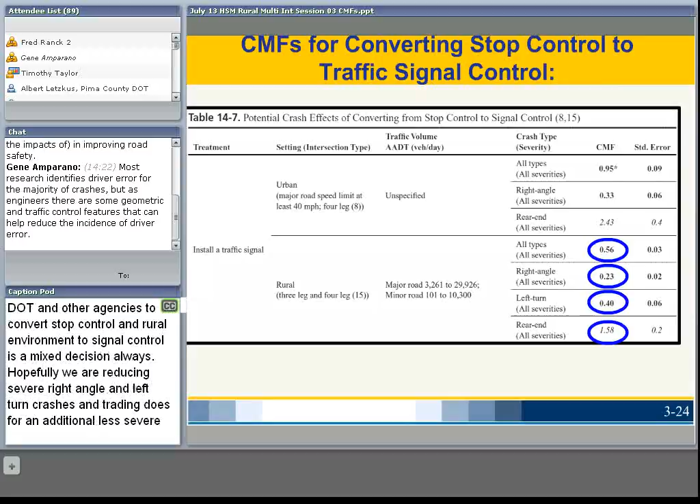The potential crash effects of converting from stop control to signal control: in the rural environment, all types of severities, the effect overall is a 44% reduction in crashes, a CMF of 0.56. We greatly reduce, hence the small CMF value, right angle crashes, the severe ones, for installing the signal in the rural environment. Our right angle and left turn severity are also positive things, but look what happens to rear end crashes, a 60% increase over what we had before.

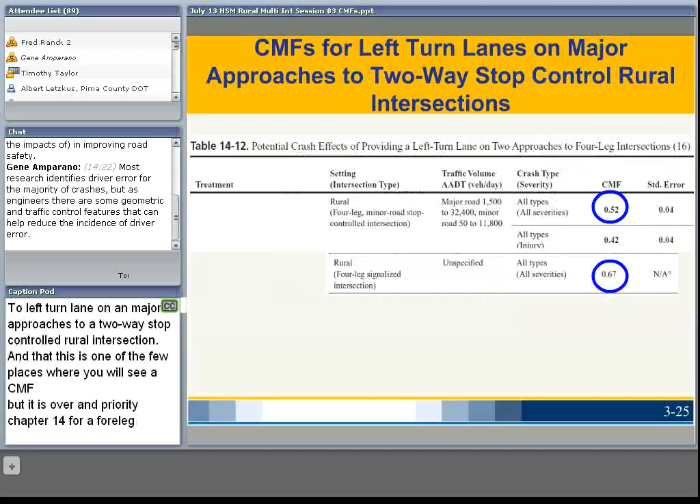The decision by state DOTs and other agencies to convert stop control in the rural environment to signal control is always a mixed decision. Hopefully we're reducing severe right angle and left turn crashes and trading those for additional, less severe rear end crashes. Not an easy decision, it never has been, but at least in Table 14-7 you can see what's at play, what's at work, and what the effects are.

Left turn lanes on major approaches to a two-way stop control rural intersection. This is one of the few places where you'll see a CMF, but it's over in Part D, Chapter 14, for a 4-leg signalized rural intersection.

Right turn lane on two major approaches to a two-way stop control rural intersection. The effects are shown as a function of the range of ADTs, from 1,500 up to 40,000 on the major road, minor road from 25 vehicles a day up through 26,000. A right turn lane on two approaches, so that's two right turn lanes, even though it says a right turn lane up in the legend of the title.

There's additional good information available that goes beyond what's in the first edition of the HSM. You can find it in a recently available, published electronically, available on the NCHRP TRB webpage for NCHRP 650. This is the work of Dr. Tom Maze and others at CTRE, Iowa State, for high-speed expressway intersections.

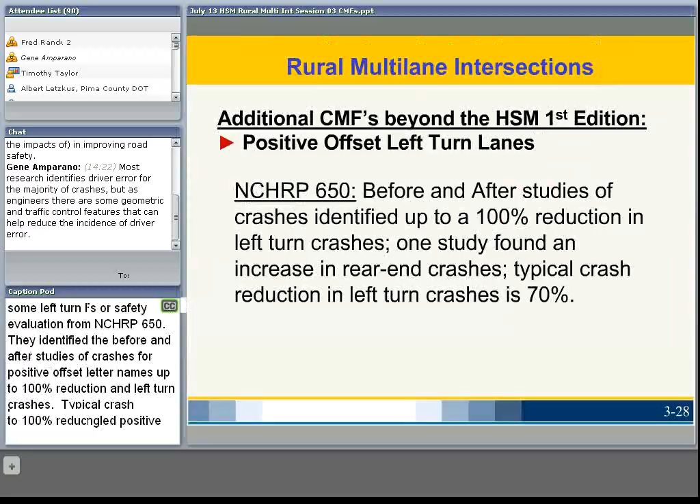I wanted to bring this to you. It's not in the HSM. You may expect to see it in a next edition to the HSM. The quality of the research was high, it was good. It assesses the positive effects of positive offset for left turn lanes, access density from TTI, and J turns.

So for these additional CMFs, or safety evaluations from NCHRP 650, they identified that before and after studies of crashes for positive offset left turn lanes show up to 100% reduction in left turn crashes. Typical crash reduction for angled positive offset left turn lanes for rural expressway intersections are around 70%.

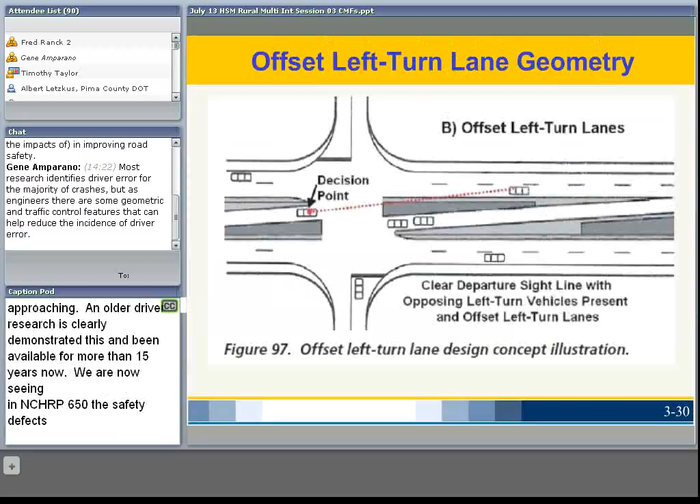This is the conventional alignment of left turn lanes, which has negative offset, so that any vehicle in the opposing left turn lane blocks the view of the turning vehicle at the decision point of through traffic coming through and approaching the intersection at a high speed.

By moving them over with an angled positive offset, we move the driver closer to the point of the turn, less distance, less exposure in the turn, less time to be exposed, and most importantly, able to clearly see, unobstructed, the vehicle approaching.

Older driver research has clearly demonstrated this and been available for more than 15 years now. We're now seeing in NCHRP 650 the safety effects being quantified. The number of studies and locations is not large yet, and that's what's prevented it to date from being in the Highway Safety Manual.

So positive offset is being able to see unobstructed an oncoming through vehicle, a conflicting vehicle, not obstructed by the opposing vehicle in the opposing left turn lane. Some examples.

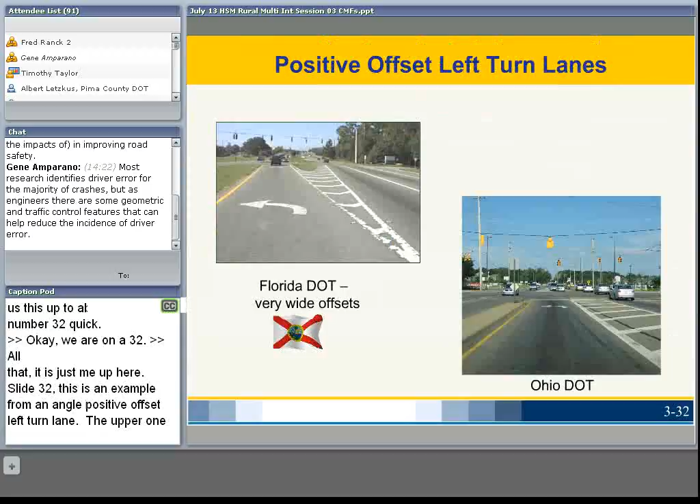Some additional... go back, somehow it jumped a whole bunch of slides on me here. Let me get us back. Gene, can you back us up? I'm apparently hanging up here for whatever reasons. Can you back us up to about slide number 32?

Okay, we're on 32, all righty, it's just me that's hung up here. Slide 32, this is an example of an angled positive offset left turn lane. The upper one's from Florida. The lower right is a parallel positive offset from Ohio, signalized.

Go to slide 33. This is an example at a signalized intersection, overhead span wire with backplates, signal head per lane, from Florence, South Carolina by South Carolina DOT of angled positive offset. That pickup truck you're looking at the back of has a very short distance that he's exposed to when he turns and crosses, much less than for the paralleling left turn lane alignment.

Slide 34, if you would, illustrates an unsignalized stop controlled side street on South Carolina 327 in South Carolina, a design by South Carolina DOT, not with long tapers. Their tapers are rather shorter, and it's very cost effective.

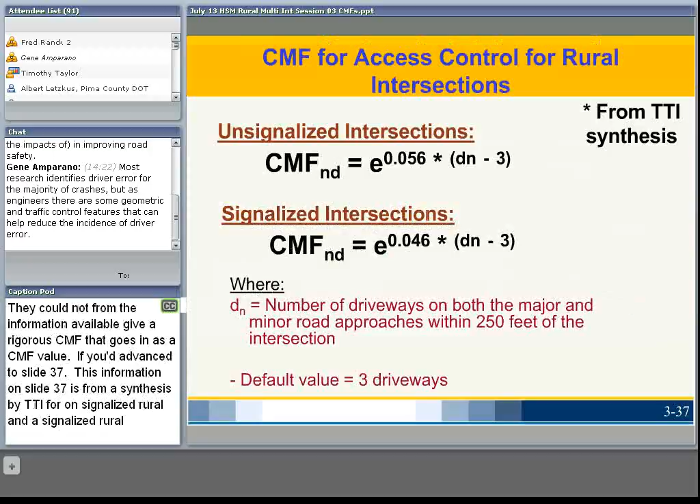If you would advance us on to slide 36, some additional CMFs beyond the HSM for access density. The Highway Safety Manual indicates that there's certainly a trend between crash frequency and access management at or near intersections within 250 feet. In this first edition, they say that the quantitative information indicates a trend.

They could not, from the information available, give a rigorous CMF value. If you'd advance to slide 37, Gene. So this information on slide 37 is from a synthesis by TTI for unsignalized rural and signalized rural intersections. The default number of driveways is 3.

Advance to slide 38, if you'd be so kind. An example for 4 driveways on the U.S. route and 3 driveways on the county route intersecting, for a total of 7. 7 minus 3 is 4, and our value is 1.251 for the CMF.

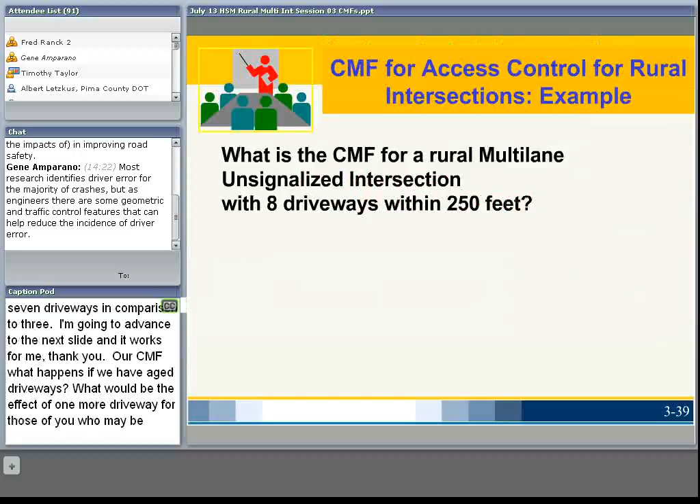Now, those of you who have managed to make it through multiple of these webinars on the HSM should have a feel for now what's a big CMF safety effect and what's a small one. This is a big effect - 1.251, or a 25% increased crash frequency as the effect of 7 driveways in comparison to 3.

I'm going to advance to the next slide, and it does work for me. Gene, thank you. So our CMF - what happens if we have 8 driveways? What would be the effect of 1 more driveway? For those of you who may be involved as permit engineers in your district or for your agency, and somebody wanting an additional driveway within 250 feet either side of the road of a multi-lane unsignalized intersection, we'd use our 4 approach CMF, plug in 8 for the number of driveways.

And I'll just let you think. If the answer before was 1.251, and now we're going to have one more driveway, what do you think the effect will be? Will it decrease? Will it double, which would be selection B? Will it be real small, like selection C, or is it D? And the answer is...

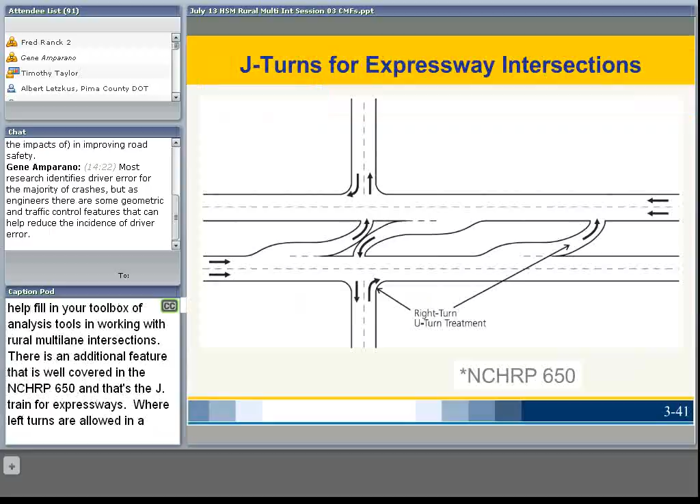Why, it's item D - a 32.3% increase in crash frequency, going up from 25% more crashes, is the effect of one driveway within 250 feet of a rural multi-lane intersection. Now, this is not in the Highway Safety Manual, this is beyond it. But it's a good working value that didn't make it into the first edition of the HSM that will help fill your toolbox of analysis tools in working with rural multi-lane intersections.

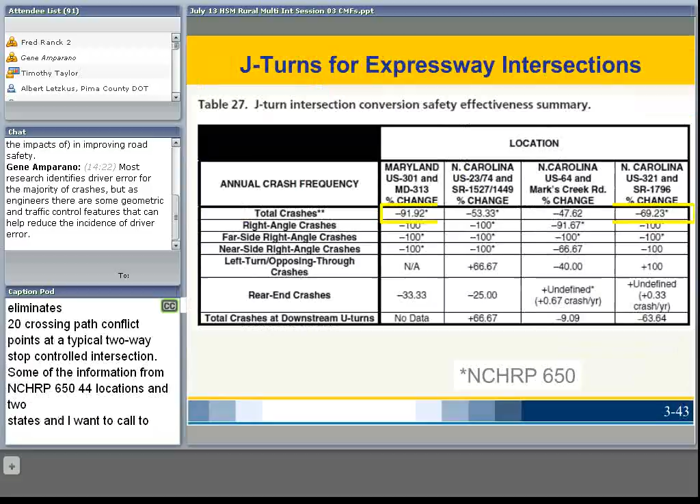There's an additional feature well covered in NCHRP 650, and that's the J-turn for expressways, where left turns are allowed in but left turns are not allowed out. The path leads back through the intersection. Minor road traffic wishing to cross or turn left is forced to turn right, make a downstream U-turn at a planned U-turn point, and return to complete their desired maneuver. This conflict point management strategy eliminates 20 crossing path conflict points at a typical two-way stop-controlled intersection.

Some information from NCHRP 650 for 4 locations in 2 states. I want to call your attention to the effect on total crashes. These are huge numbers: decreases in total crashes of 91%, 53%, 47%, 69% - this is a huge safety measure.

Now, the issue is always in dealing with the public. This is usually a change in geometrics that's done after a protracted and long public hearing process, but it is a known safety measure, well documented in NCHRP 650, and I would expect we'll see J-turns included with a specific CMF in the next edition of the Highway Safety Manual.

So in this third of the three sessions on rural multi-lane intersections, we've described crash modification factors for rural multi-lane and applied them. Almost all of the CMFs, all but one, were for stop-controlled multi-lane rural intersections. We only indicated one from Part D, Chapter 14, for signalized rural multi-lane.